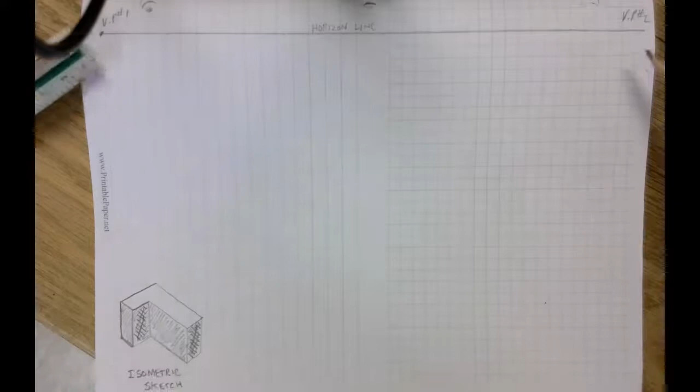So go ahead, find a scrap piece of paper, get a straight edge. If you don't have a straight edge, get a piece of cardboard, get the edge of a book, and let's get ready to draw this. Remember, everything will be drawn within our 2 vanishing points. So I'm going to have a VP here, and I already have one here.

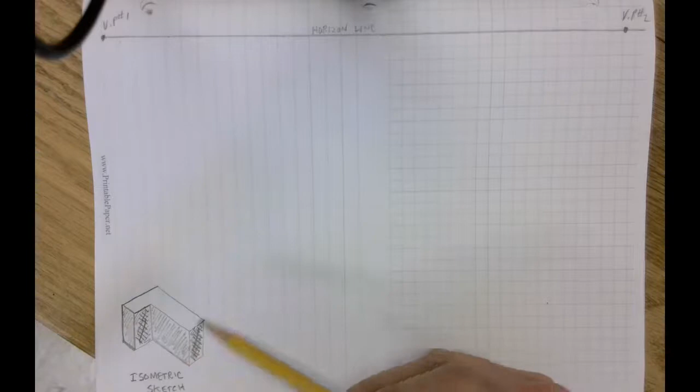I will start by sketching an overall box which would create this shape. So it's going to be a vertical line on our paper. The placement of that vertical line is totally dependent on the drafter, so totally dependent on you. Every single drawing that we're doing will look slightly different based on our approximations. So draw that vertical line, start projecting lines back to vanishing points.

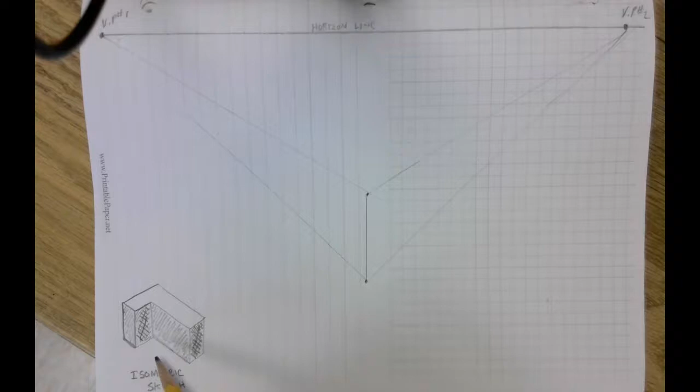So there it is, and that's going to be the overall height of the object. I'm going to approximate the overall width of the object to be here. So I need to create a vertical line. I have an intersection. I will create another point back to a VP. Once again, I'm creating that overall cube that this object is going to be drawn within.

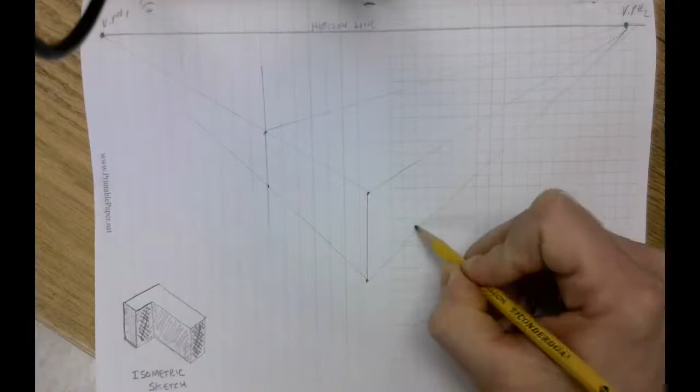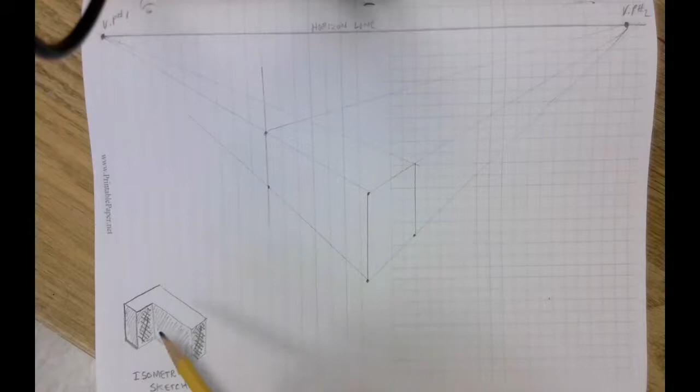My overall depth of the object I will calculate at here. Once again, all of these pick points are approximations, and it's pretty much, we could consider, a little bit of guesswork. So now I have that overall box, and now I need to draw this shape within this box. There are actually three surfaces that can be seen on the outsides of the box. Surface 1 can be seen, surface 2, and surface 3 can be seen on the outside of this box.

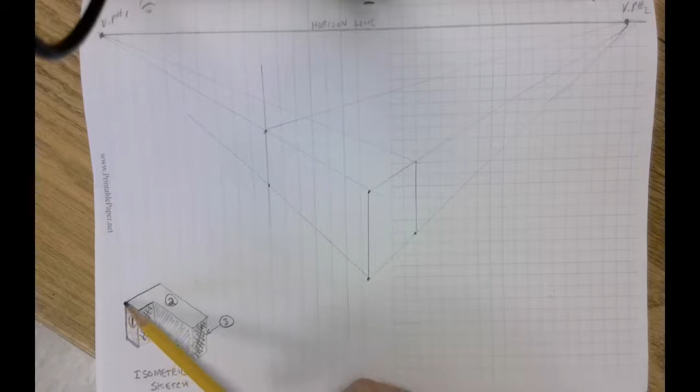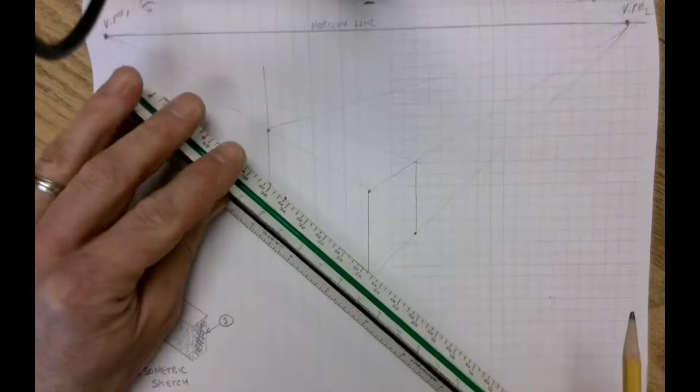Let's start with surface 1. I know it's all the way to the left edge, and I know it doesn't take up too much room on the width. So I am going to put a mark here to represent the distance of this width, and I'll make an annotation of that. I'll go straight upward because that's the overall height. And I'll darken the shape completely in. So this is surface 1.

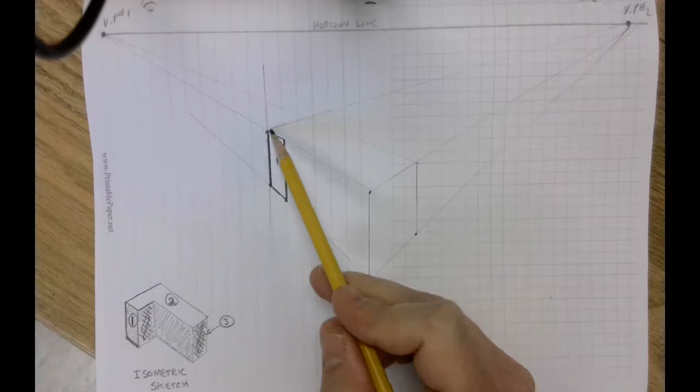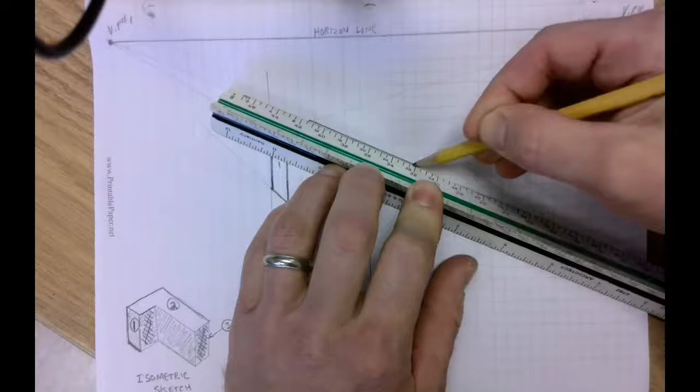Surface 2, I know it is along the entire left edge of my box, so I can darken this line in. I know it runs along the entire edge of the box here, so I can fill that in. And then I have to make a few approximations. So this is a known point, this is a known point. I need to approximate this distance right here. I'm going to say it's about like that.

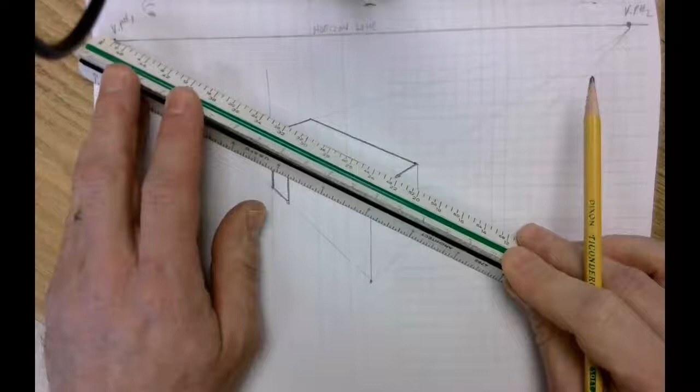And now I need to project this endpoint back to a VP along with this endpoint back to a VP, which creates a known intersection. That known intersection is here. Darken that in.

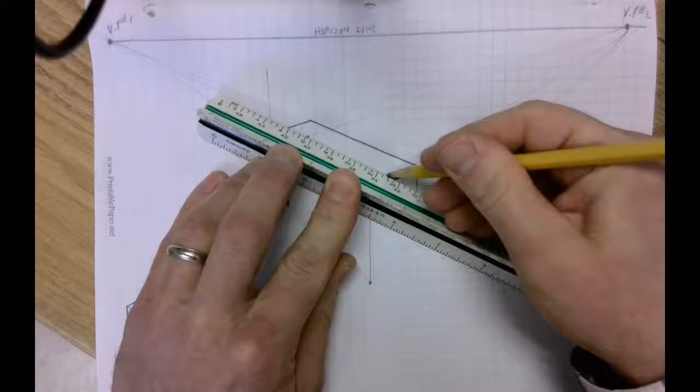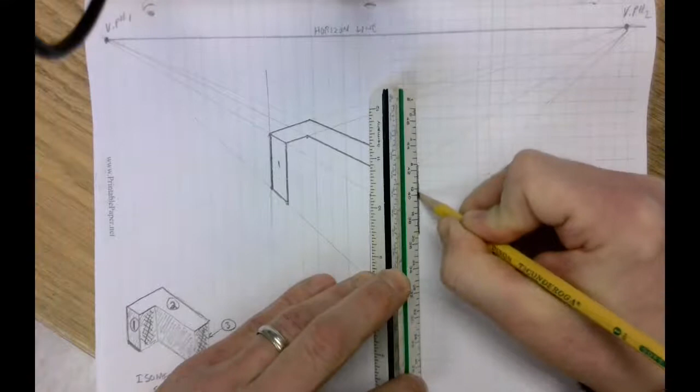I've got a few more points that are now known. This is an intersection; I have to come straight down vertically. And that will give me surface 3. Same thing here. So that's surface 2. This is surface 3.

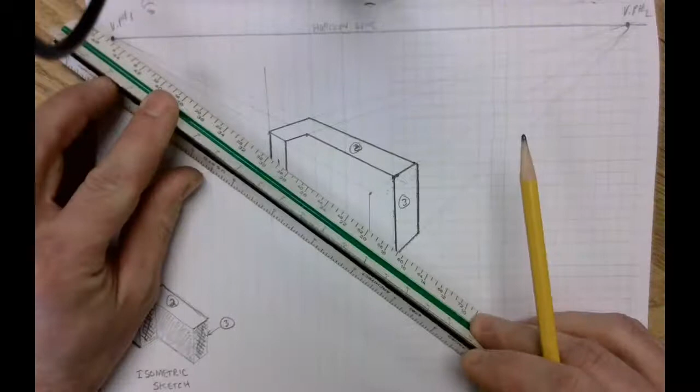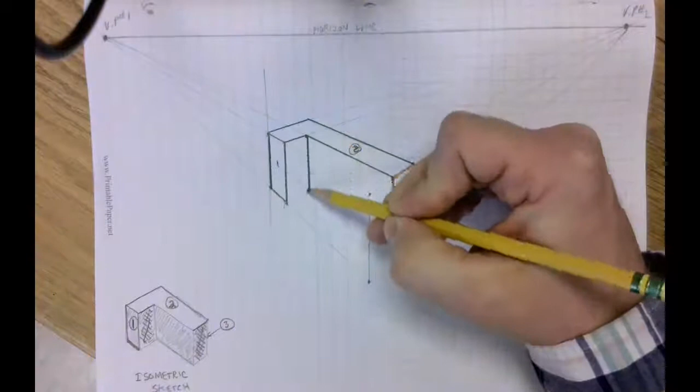This known point has to be projected back to a VP. This known point has to be projected back to a VP, which gives me an intersection here. And coincidentally, it should line up fairly well with this intersection, which it does.

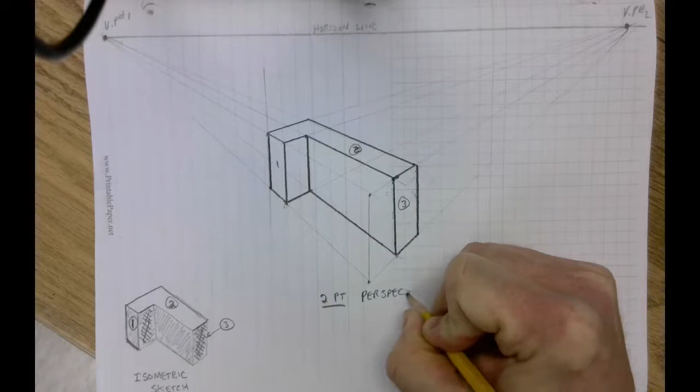I'm a little bit off due to some slight inaccuracies projecting back to a VP, but I think you get the point. So once again, this is a 2-point perspective. This needs to be drawn, and once again, isometric sketch to perspective.